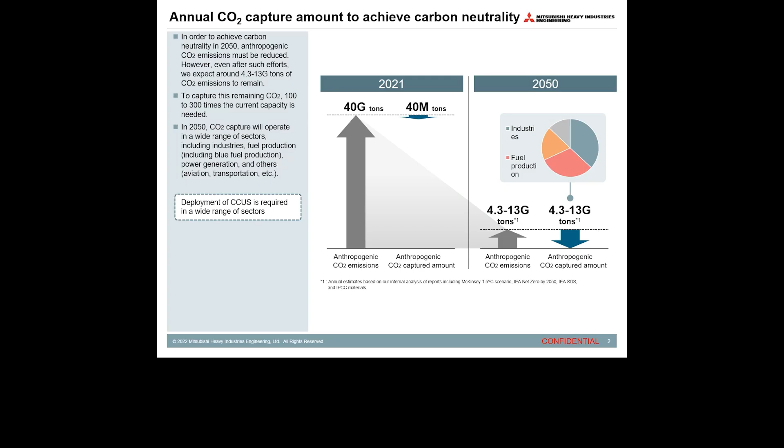In order to achieve carbon neutrality in 2050, anthropogenic CO2 emissions must be reduced. However, even after such efforts, we expect around 4.3 to 13 gigatons of CO2 emission to remain. To capture this remaining CO2, 100 to 300 times the capacity is needed. By 2050, CO2 capture will operate in a wide range of sectors, including industries, fuel production including blue fuel production, power generation, and others such as aviation and transportation.

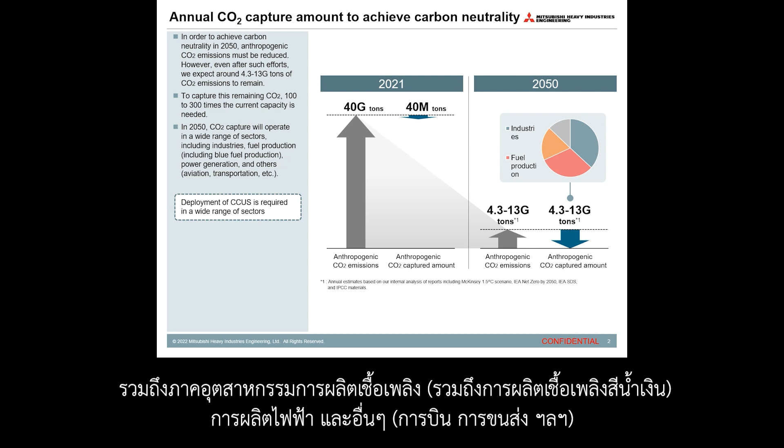MHI has been working on CO2 capture since the 1990s, and we currently receive more inquiries for CO2 capture plans than ever before. In addition to CO2 capture from fossil fuel-fired flue gas, MHI is working on R&D and demonstration tests for negative CO2 emissions, such as capturing CO2 from waste-to-energy plants, biomass plants, and direct air capture.

MHI is suggesting the CCUS digital platform for CO2 value chain building, and it can realize data transparency and business flexibility for tracing and trading of CO2.

MHI is investing in innovative startups for accelerating R&D of technologies and products. One example of an innovative company which MHI invested in is Infinium, which has technology to produce electrofuels from green hydrogen and CO2.

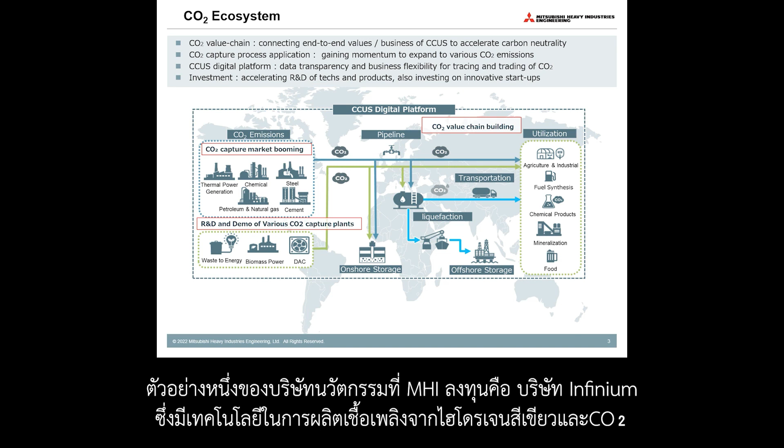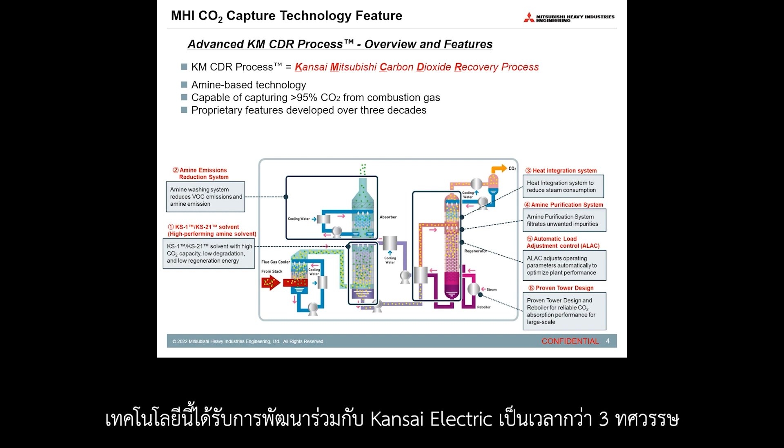I would like to introduce MHI's CO2 capture plant technology, which is called the KM CDR process. This technology has been jointly developed with Kansai Electric for 3 decades. It is an amine-based technology and can absorb CO2 from combustion gas at more than 95%.

The KM CDR process has 6 main features. The first feature is the high-performing proprietary amine solvent, KS-1 and KS-21, which has high CO2 capacity, low degradation characteristics, and low regeneration energy requirement.

The second feature is the amine emission reduction system, which can reduce VOC emission and amine emission. The third feature is a heat integration system, which can reduce steam consumption. The fourth feature is the amine purification system, which can filtrate unwanted impurities.

The fifth feature is automatic load adjustment control, which can adjust operating parameters automatically to optimize plant performance. The last feature is proven tower design, which can ensure reliable CO2 absorption performance for large scale.

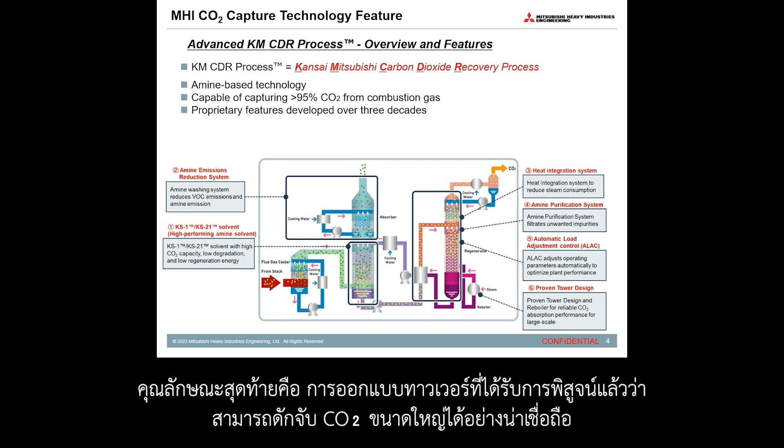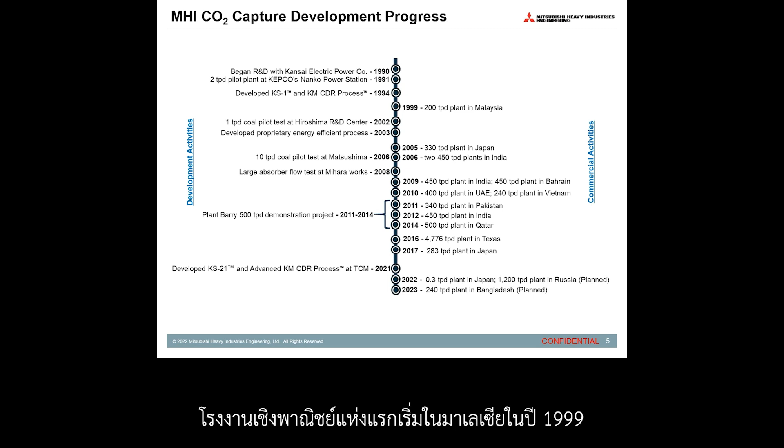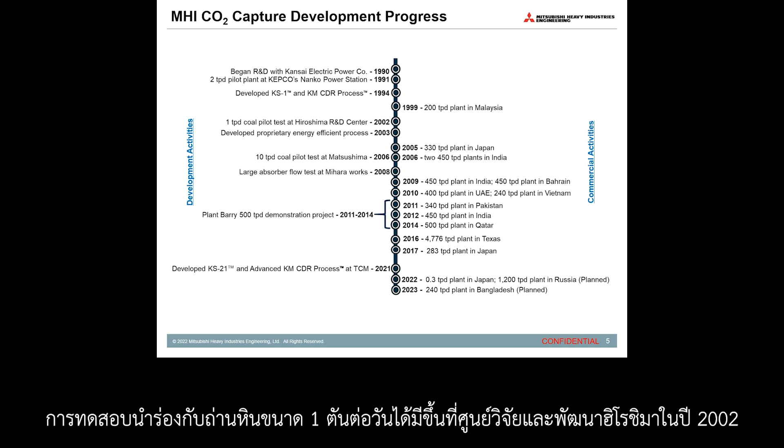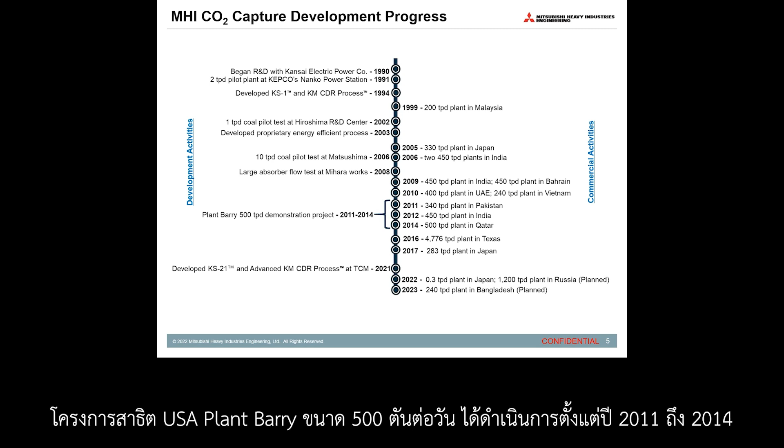The first commercial plant was started in Malaysia in 1999. A 1-ton per day coal pilot test was started at Hiroshima R&D Center in 2002. The US Plant Barry 500-ton per day demonstration project was conducted from 2011 to 2014. KS-21 and the advanced KM CDR process was demonstrated at TCM in 2021.

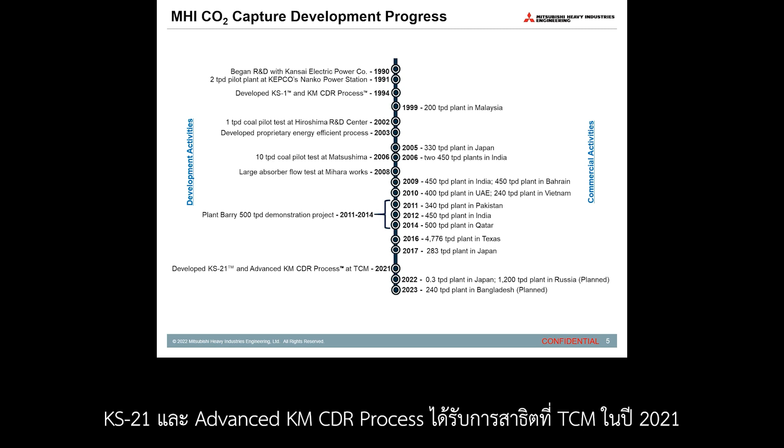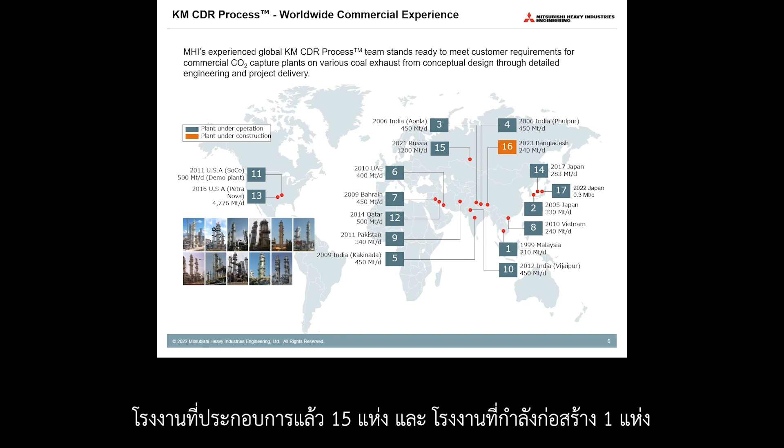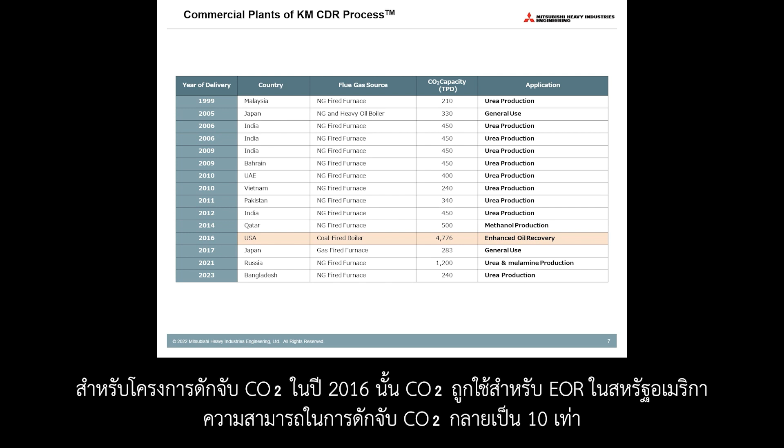The major application is urea production. CO2 capture plants were added to fertilizer plants, capturing from the flue gas of the reformers. The recovered CO2 was synthesized with ammonia and converted to urea. For the 2016 CO2 capture project, CO2 was applied for CO2 EOR in the USA, and therefore CO2 capacity became about 10 times larger.

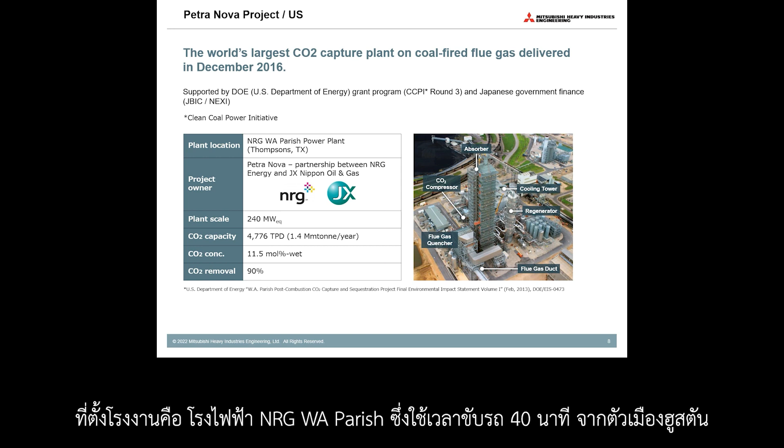This slide shows the outline of the world's largest CO2 capture plant. This project was supported by the DOE grant program CCPI Round 3, and Japanese government finance. The plant is located at NRG's W.A. Parish Power Plant, which is a 40-minute drive from downtown Houston. The project owner was Petra Nova, a partnership between NRG Energy and JX Nippon Oil & Gas.

The Petra Nova project was completed on budget and on schedule. This project was awarded Plant of the Year by Power Magazine.

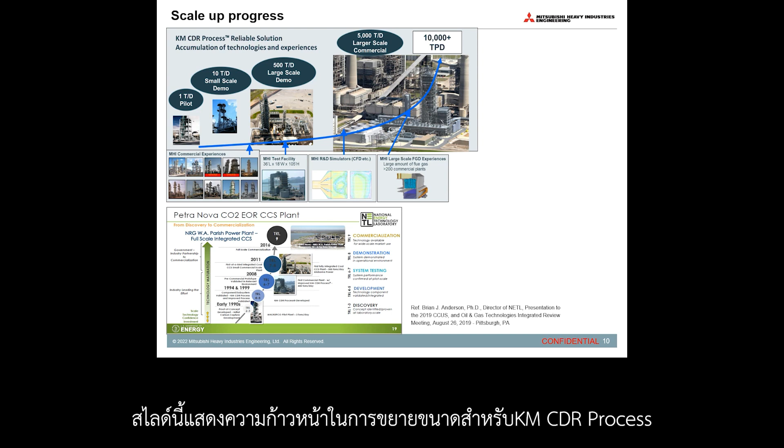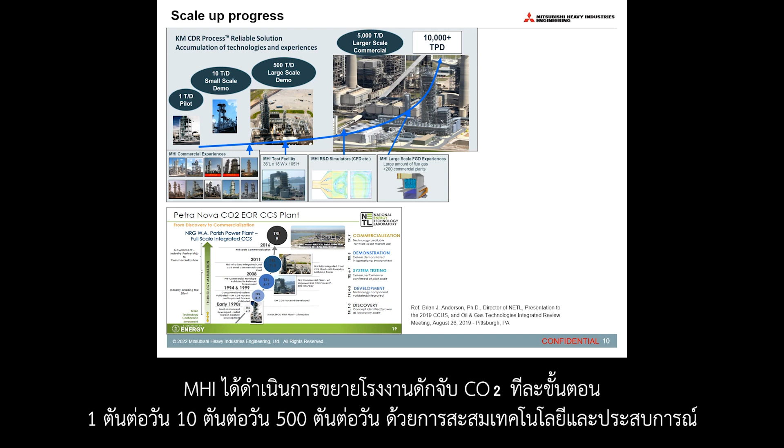This slide shows the scale-up progress for the KM CDR Process. In order to achieve the 5,000 ton per day commercial plant, MHI conducted the scale-up of the CO2 capture plant step-by-step: 1 ton per day, 10 ton per day, 500 ton per day, accumulating technologies and experience. In addition, DOE evaluated the KM CDR Process at Technology Readiness Level 9, meaning the technology is available for wide-scale market use.

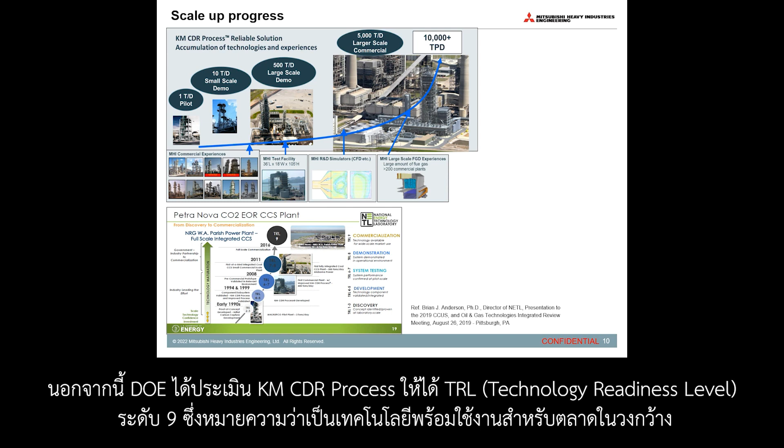Drax and MHI have agreed a long-term contract for use of MHI's carbon capture technology at the Drax BECCS project. This project will become the world's largest carbon capture project, with more than 5 times the capacity of Petra Nova. This project will be the world's first negative emission project, and the UK's first carbon capture project at scale.

MHI Engineering has entered into an agreement with the Technology Centre Mongstad (TCM) to test its proprietary solvent for capturing CO2 at the amine plant located in Mongstad, Norway. The test campaign was completed in October 2021.

KS-21 solvent, jointly developed with KEPCO, achieved up to 99.8% flue gas carbon capture rate.

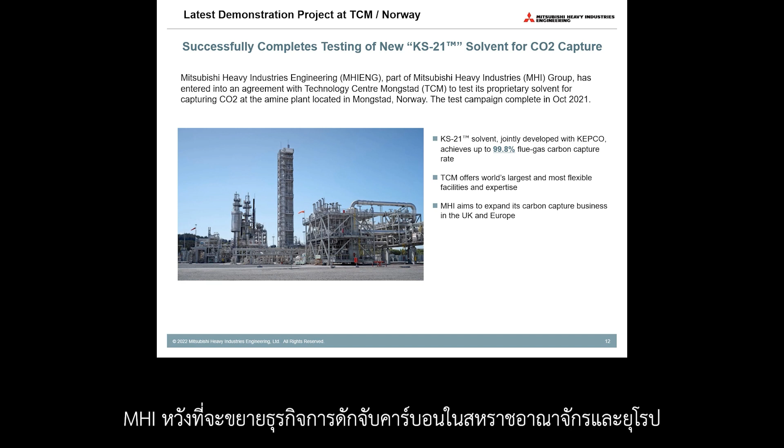TCM offers the world's largest and most flexible facility and expertise. MHI aims to expand its carbon capture business in the UK and Europe.

We are further expanding the number of applications for CO2 capture based on our core technology. As a leading company in CO2 capture, we offer a wide range of CO2 capture technologies.

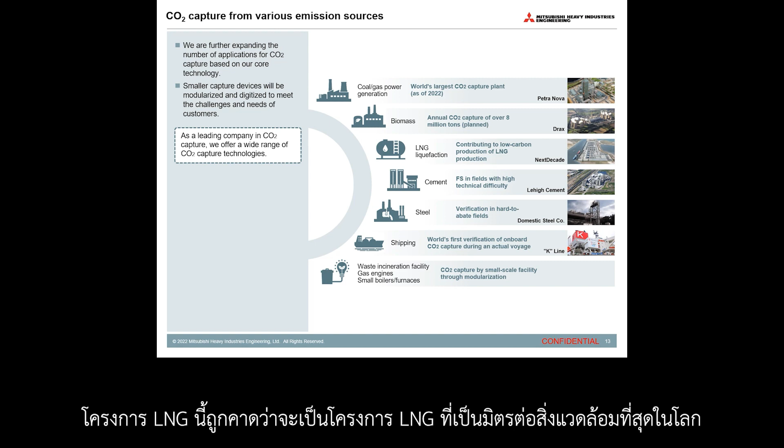For the NextDecade project in Texas, USA, a CO2 capture plant will be installed at the energy plant to capture CO2 from the exhaust gas from the gas turbine for refrigerators. This LNG project is expected to become the greenest LNG project in the world.

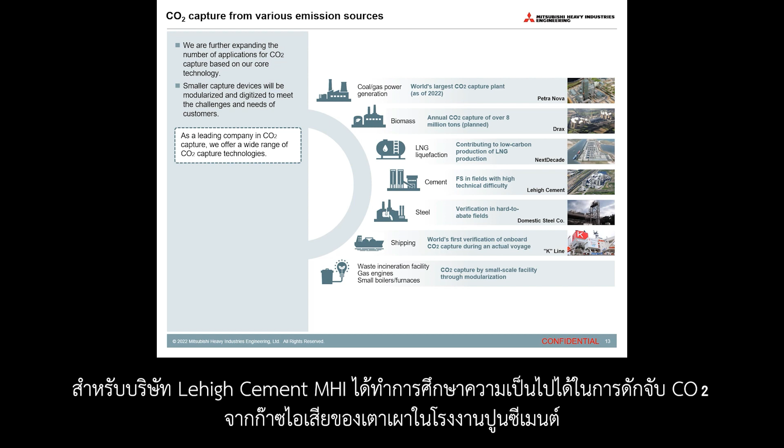MHI's America branch was awarded the process design package. For Lehigh Cement, MHI conducted a feasibility study for capturing CO2 from the flue gas of the kiln in the cement plant.

For the K-Line project, the world's first verification of on-board CO2 capture was conducted during an actual voyage.

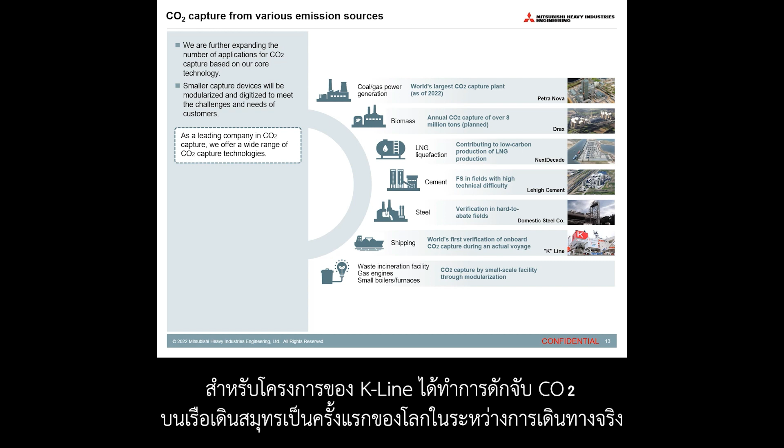MHI is currently designing tailor-made CO2 capture plants for large-scale CO2 emission sources, such as gas-fired power, coal-fired power, and chemical plants. In the future, our product line should be expanded to standardized and modularized CO2 capture plants in order to increase production numbers and reduce the cost of medium and small-scale capture plants.

The current standardized and modularized CO2 capture plant lineup ranges from 0.3 ton per day to 200 ton per day, across 5 capacities. All product lines will be ready by 2023.

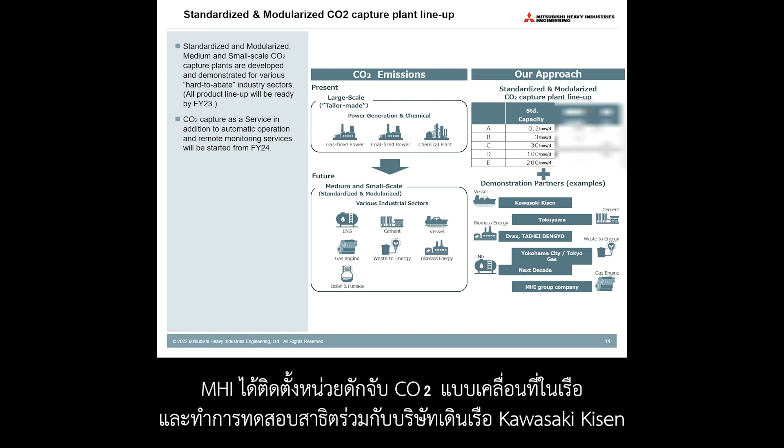MHI is proceeding with demonstration tests with various partners. MHI installed a mobile CO2 capture unit on a vessel and conducted a demonstration test with the Kawasaki Kisen shipping company.

CO2 capture as a service, in addition to automatic operation and remote monitoring service, will be started from 2024, in order to make it easier for many companies to introduce CO2 capture plants.

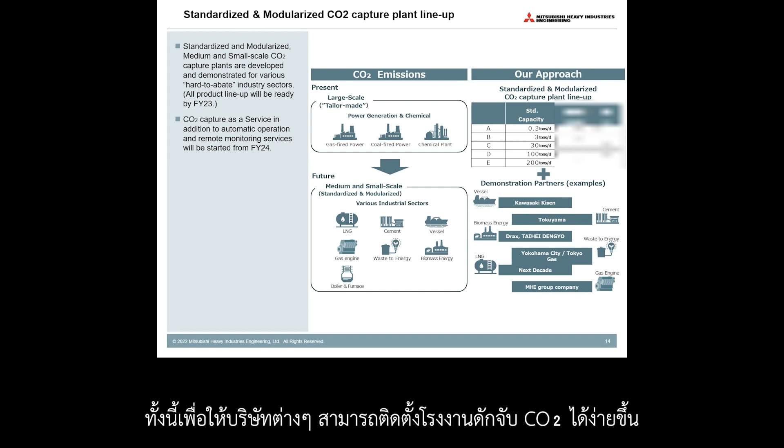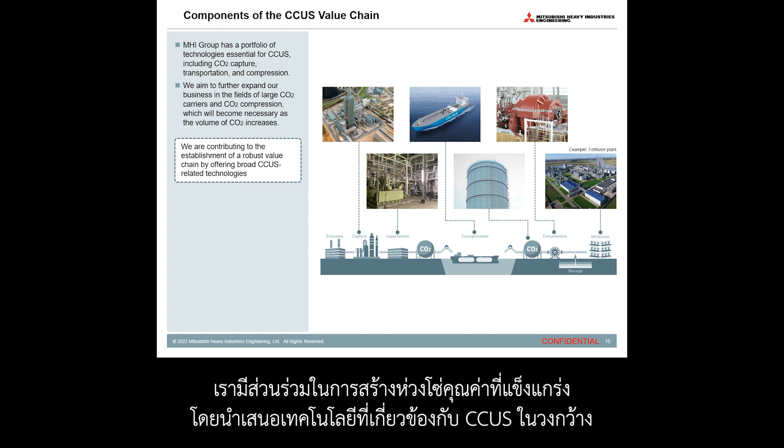MHI Group has a portfolio of technology essential for CCUS, including CO2 capture, transportation, and compression. We aim to further expand our business in the field of large CO2 carriers and CO2 compression, which will become necessary as the volume of CO2 increases. We are contributing to the establishment of a robust value chain by offering broad CCUS-related technology. Thank you very much.